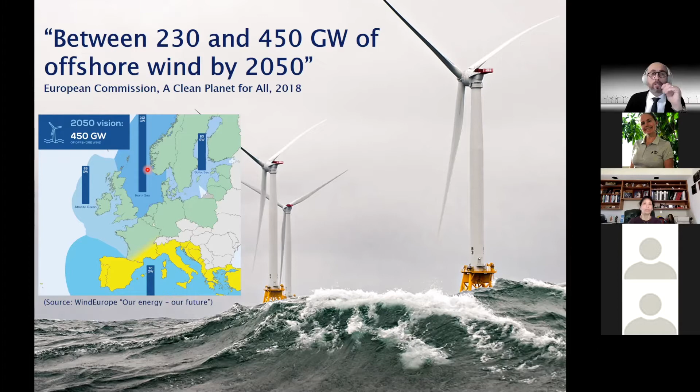However, offshore is not going to be all of it. These are long-term strategies of the European Commission, which expects that even in 2050, 60% of wind will still come from onshore installations. So this means onshore is not going away—actually, onshore is going to play a very important role.

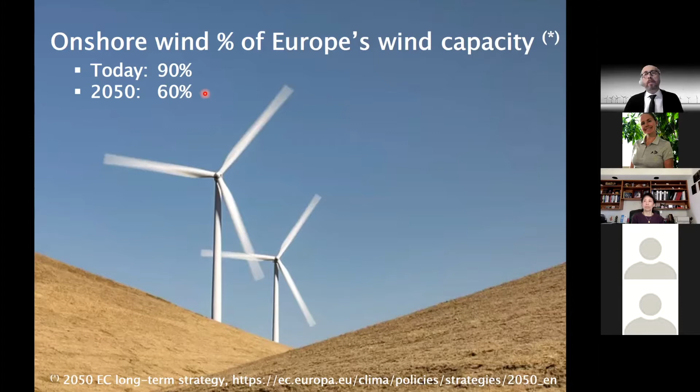And once again, onshore, especially in highly populated areas like Europe, means impacts. So the mitigation of impacts is really becoming a very pressing need. These are very ambitious plans and targets.

So the question is, what will take us there? What can make this possible? In my opinion, there are two fundamental things: innovation and scientific knowledge. So today we'll talk about a mix of the two.

I want to point out that I had the privilege recently to work with a number of distinguished colleagues, many of whom are here today. We wrote together a paper published in Science, where we identified three main grand challenges that need to be overcome in order to achieve these goals.

These grand challenges deal with the understanding, modeling, and simulation of the atmospheric and plant flow, and the turbine and the plant. The work we do in my institute is mostly related to the second and third topics—turbine level and plant level—so I'll spend most of the time today talking about those two things.

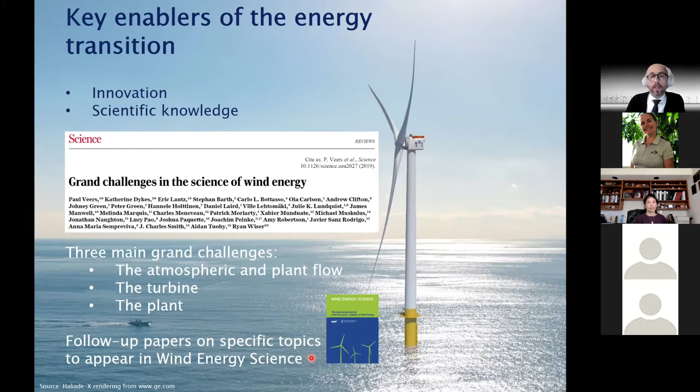However, before I jump there, I want to say a few words about the flow, which I think is of fundamental importance, although it's not really my field. The original team has split into smaller teams, and we recruited additional people to work on follow-up papers on specific scientific topics, which will appear in Wind Energy Science, the open access peer-reviewed journal of the European Academy of Wind Energy.

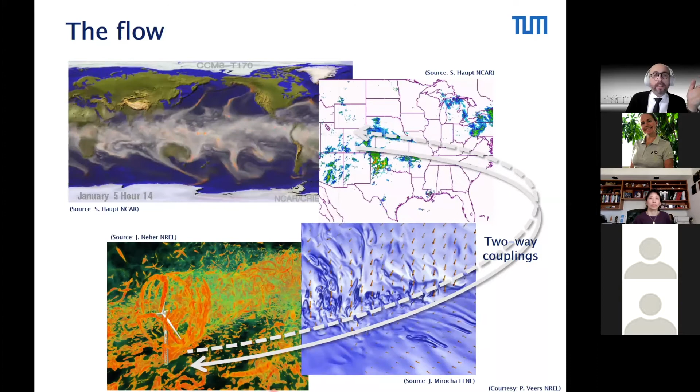So I want to show you this beautiful collection of movies I got some time ago, courtesy of Paul Veers, that makes the point that in reality this is a fundamental problem of incredible range of scales. We go from the global scale to the regional scale, to the plant level scale, then down to the inflow of the single turbine. This really is an extreme multi-scale, multidisciplinary challenge.

We need to be able to model and simulate what happens at the boundary layer scale—scales in space of millimeters and in time of milliseconds. Then you have to go through the inflow at the rotor, the intra-plant flow, we'll come back to that later, to the mesoscales, where you look at scales of tens, hundreds, sometimes thousands of kilometers, and time scales of hours, days, sometimes even weeks. So the range is incredible.

And this is not only a problem from the aerodynamic point of view—you have a similar situation from, for example, a structural point of view. When you look at material behavior and composites, you have matrix and fiber, microcracking, very small scale phenomena both in space and time. And then you go to the interaction of a 200-meter rotor with the inflow. So this is a fundamental challenge.

This fundamental challenge is even more difficult because it cannot be answered only by looking at super high fidelity, first principle methods, models, and tools. In reality, we have to design and deploy these machines, and therefore we are engineers in the end, and we have to solve a number of practical problems.

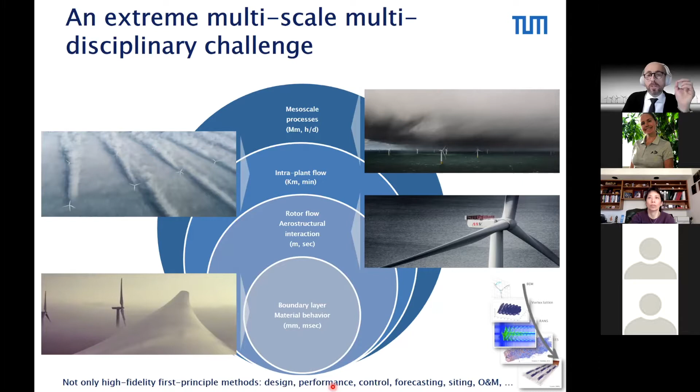And so, for example, design, performance, controls, forecasting, siting, operation and maintenance. In order to support these applications, you need a range of tools that are able to span the scales in space and time, but also span the application space, which is extremely challenging. Also, some of these applications are extremely demanding, repetitive tasks where you have to do multiple simulations many times, for example, because you're optimizing something. So this really raises the bar and makes this one of the main challenges, I think.

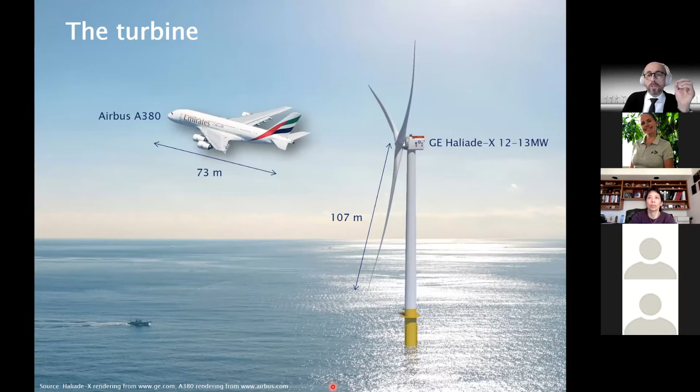Now let's turn the attention maybe to the turbine, and then we'll talk a little bit about the plant, because as I say, this is maybe closer to the things that we do. So I just want you to look at this picture to get an idea that we're dealing with the largest rotating machines on Earth. And getting there has been a process that goes back a long time.

It started a long time ago in garages in Denmark, which, however, these guys identified, I think, a configuration that is clear as a very important potential. And over time, this has grown and will keep growing over time. And this has been made possible not by simply zooming up or upscaling the initial designs. Really, this path of growth and evolution has been made possible by fundamental innovation at all levels.

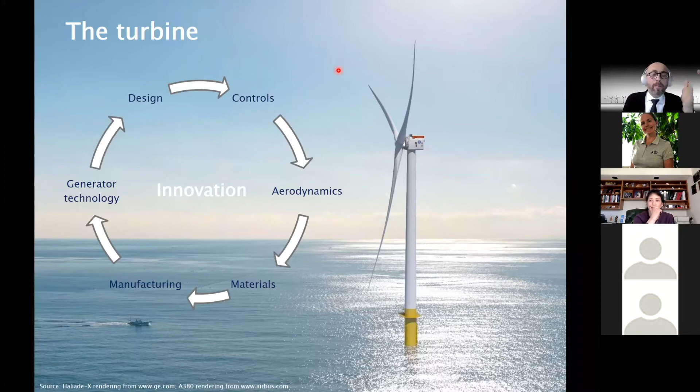So if you talk about the turbine, I tried to list here some of the areas where innovation is important. It's certainly not an exhaustive list, but design and controls technology, aerodynamics, materials, manufacturing, generators technology. Innovation is really present everywhere. I think this is clear to everybody.

What I want to highlight here is one important thing: the importance of assessing the value of innovation. Sometimes it's relatively easy to have an idea, but then in the end, whenever you have something new, you have to realize that you'll have some benefits, but you'll also have some drawbacks. And so in the end, you have to ask yourself, okay, this is a nice idea, but do the benefits really offset the drawbacks? Does it make sense to use this? Does it really pay off? And sometimes answering this question is not obvious.

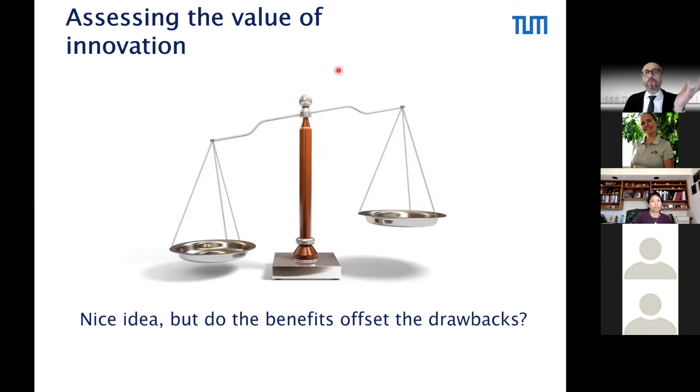So you can give lots of different examples. I take the opportunity to show you one recent example taken from a paper from one of my very brilliant PhD candidates in my group. Here we have been looking at lidar-assisted controls.

This is nothing new, this is called LAC. The idea is that you have a LiDAR, a sensor that is scanning the wind in front of the rotor and measuring the wind. This is beautiful because you are measuring in front of the rotor. So let's say that you measure 100 meters in front of the rotor and you have a 10 meters per second wind. It means that you're measuring the wind that will hit the rotor 10 seconds from now. So you have a preview of the future.

This is fantastic because, by definition, if you think about feedback controls, feedback controls is always late. When you do feedback controls, you're measuring the response of something, and then you're reacting to that measurement or response. But if you measure a response, it means that something is already happening, so by definition, you're late. With preview information, you avoid this because you look into the future.

So this is certainly a very nice idea. There have been many papers over several years, with people looking at various formulations and so on, and it's clear that this is a significant potential for reducing loading. So now that we know that we can reduce loads, then the question is, okay, what do I do with these reduced loads? I can try to improve the design. And so we try to see whether these load reductions really make sense and bring value.

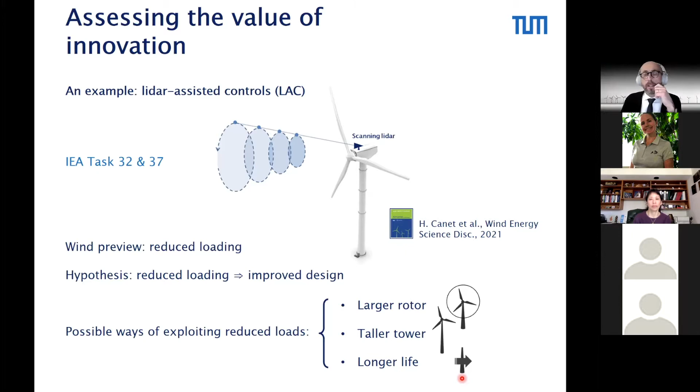The tower becomes an expensive component with a longer lifetime. Again, this is something that could be enabled by lidar. So we studied these three ideas looking at three very different turbines: a 10 megawatt class 1A offshore, a 2.2 megawatt class 2A onshore, and a 3.4 megawatt class 3A onshore. We looked at the potential of lidar for redesigning these turbines.

The main findings are: first, you can try to reduce ultimate loads. The problem is that not all components are driven by ultimate loads, only some of them. And not all driving loads come from conditions that can be influenced by lidar. For example, in many turbines, some extreme loads come from conditions where the machine isn't even controlled, like idling or parked. In that case, even if you reduce a load in operation, the driving load is another one you cannot change with lidar. So basically lidar doesn't really do anything there, it doesn't bring you any value.

In addition, if you design a turbine with reduced ultimate loads thanks to lidar, you have to be very sure that lidar will always catch the condition causing those loads. This might mean having multiple lidars and ensuring availability, and so on. So it's not easy to improve the design by looking at ultimate loads using lidar.

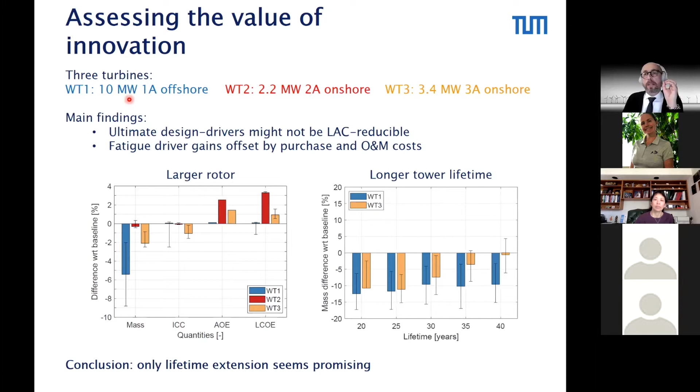The only solution where we saw some benefit is this idea of designing for a longer lifetime, especially in the case of the 10 megawatt turbine, where the tower is massive and costs a lot of money. It's not the point here to go into the details of this specific study, but the point I want to make is that real innovation is not just a new cool idea. If you want to understand whether your new cool idea really pays off, you have to take a system-level point of view. Design is really the queen of all disciplines, where you bring everything together and evaluate pros and cons and find trade-offs to really understand what works and what doesn't.

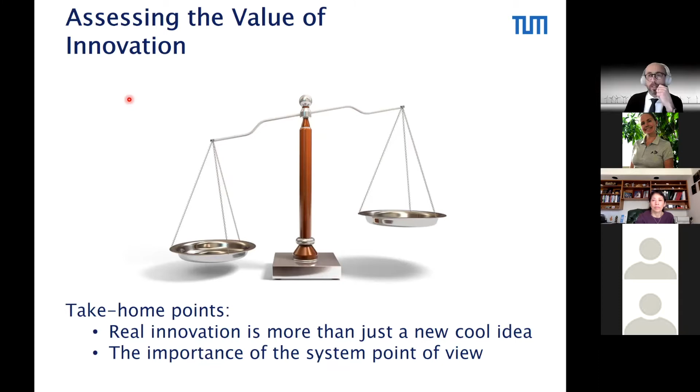I also want to make another point here: innovation should not be meant only to improve performance. In reality, especially onshore, especially in some countries—Germany, I think, is maybe the number one example—impacts are dramatically important. There are places with a lot of opposition to wind energy, and the only way to reduce this is by showing that we can mitigate the impacts. Of course, every technology will always have impacts, and wind energy also has impacts. I'll try to list here at least some of the impacts in the onshore case.

From noise to impacts on the wildlife, visual impact, also things that go maybe sometimes beyond engineering. So perception, aesthetics, heritage preservation, very important in the south of Germany, for example, but also low frequency vibrations, effects on the microclimate, crops, but also energy consumption and emissions during manufacturing of the turbine, and also end of life.

Today we're still able to recycle very little of our wind turbines. Most of the blades end up in landfills. So repurpose, recycling, all these things are becoming of great importance.

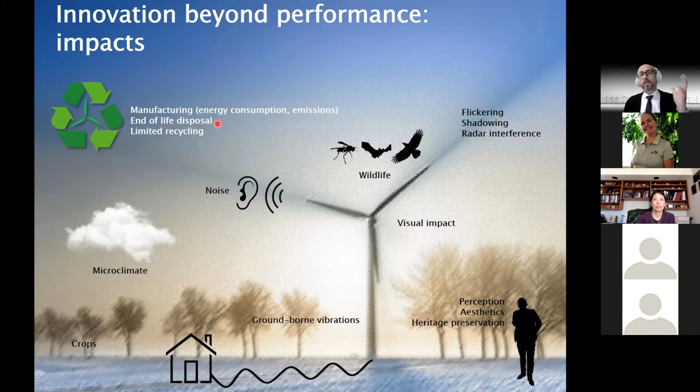Even here, I just want to give one example. Of course, this is a huge topic and a lot of people are working on these things. I just want to show one recent work that we did in my group.

We tried to say, okay, instead of designing as usual a turbine looking mostly at LCOE or other metrics, but still related to purely economic metrics, can we do an eco-conscious design of the turbine where we take into account the whole life cycle of the turbine?

So of course we still take into account LCOE, energy production, operation costs, and everything, but we also want to look at other aspects. Specifically we have been evaluating the impact in terms of greenhouse gas emissions expressed in terms of tons of CO2 equivalents.

And if you start digging into this, you can see some interesting things. You can break down the impact of energy in terms of these greenhouse gas emissions during the various stages of the life of the turbine. For example, material extraction, manufacturing, operation, end of life.

For example, end of life, here you have a negative budget in the sense that we can recycle something. This is mostly coming from the steel in the tower today, nothing more. And then in the end, we can evaluate the total impact.

You can also break it down by components and materials. This is also very interesting. It shows that the tower is the number one component we have to target, but then the nacelle, the blades are also very important. And there is not only the point of view of the turbine, you also have the point of view of the grid.

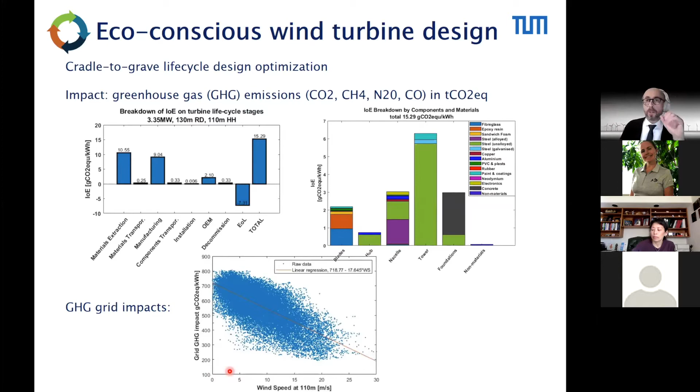The cost of energy spot market price also typically has an inverse relationship with wind speed. So both trends will push you in this direction. Again, means bigger and bigger turbines with low specific powers.

So we take this, we throw this into our design environment, which would be maybe similar to what you have in the US, like WISDEM. This is something that is able to change the blade shape, diameter, rotor, tower height, sizing, all the various structural components.

Running all the various DLCs and taking into account all the classical things that you need to take into account when you design a wind turbine according to the standards, the design standards.

So we throw this to this environment, and we solve a multi-objective optimization problem now, where we look into cost of energy, but also this environmental impact.

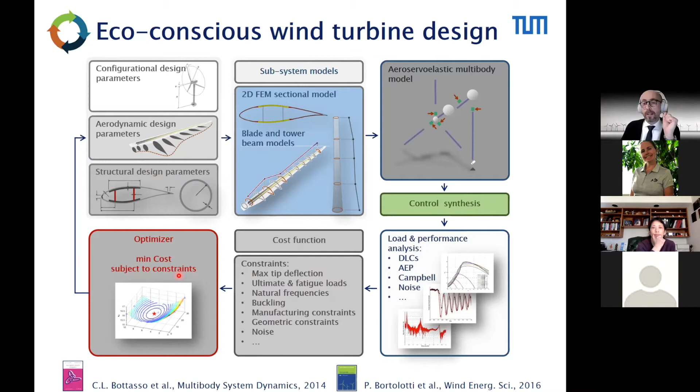We can also take into account opportunities coming from other technologies to reduce the emissions. For example, hybrid towers where you have less steel, more concrete, generator technology, materials like Elium, for example, or similar thermoplastics where you can improve the recyclability.

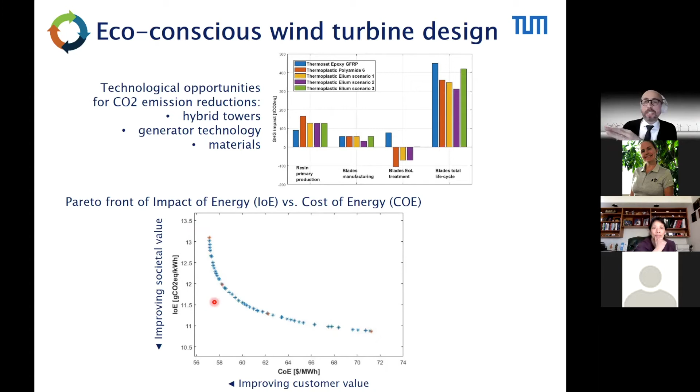This brings me to another take-home point. What is value? Value has many different meanings for different stakeholders. If you take the point of view of society or the final consumer, you might end up with different solutions. This shows we have to be careful, and there is much beyond LCOE. I really think we have to think more in the direction of value. What is value? I think we can discover lots of interesting things if we keep exploring in this direction. Let me move now to the plant level.

This is a fascinating topic because the plant is not simply a collection of wind turbines. The turbines are coupled together by the wakes. Behind the wind turbine, you have lower wind speed, so you have a speed deficit, meaning you produce less, but you also suffer increased loading due to higher turbulence. This brings the level of complexity to another level, because you have a coupling through these turbulent wakes. You have to understand how they behave, how they change properties depending on ambient conditions, the design of the turbine, and how you operate it. This is another huge area where innovation can make a really big difference.

I listed here a non-exhaustive list of important topics: wake physics, plant controls, which means how you coordinate these turbines together so you improve performance not at a single unit level, but at the level of the whole plant. How you measure what is going on, how you design the plant, how you use data, how you connect to the rest of the grid. There are lots of aspects. Clearly we cannot cover everything, so I just want to make a few points.

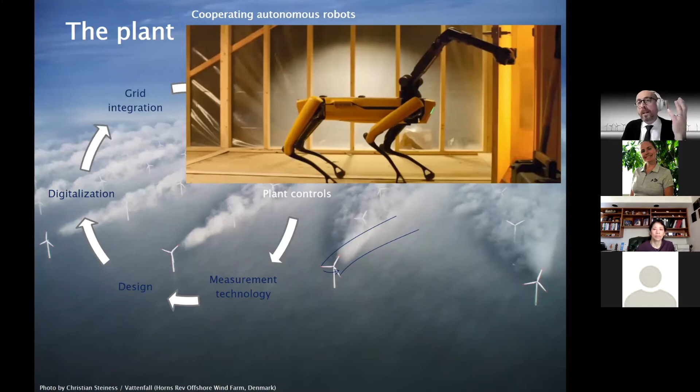Clearly, the payoffs are very important, because if we learn how to do this well, I think we can have a lot of benefits at various levels. Again, I don't want to talk about the specifics of wind farm control. I think you have lots of experts also in the US, and a lot of these ideas are also coming from people in the US. So it's not the point here to recall all this.

I just want to make a point on validation. In the end, we need to prove to industry that this works, and this is, of course, the final goal. And this is indeed also what we are doing.

So these days, we're actually running a wake steering experiment in a site called Kirch Mulsow with some colleagues in Germany. It's based on the idea of wake steering. This is the wind farm that we're using just these days for these experiments.

However, I want to say here that field testing is indispensable, but it's not an easy task. It costs money. Whenever you do field testing, you will have some power losses, probably energy losses that you'll have to compensate, and so some people will have to be reimbursed for this. You have liability issues, you have IP issues very often. Even if you work with companies, you don't have full access to all the information that is relevant to your experiment.

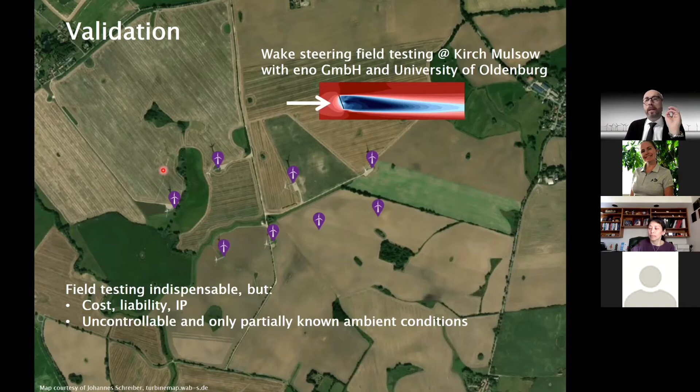In addition to this, you have no control over the environment. So the wind is what it is, and you only know it partially. Even if you have maybe a met mast, as we have in this site, even if you have LiDARs, very often you have a partial understanding of the conditions at the site.

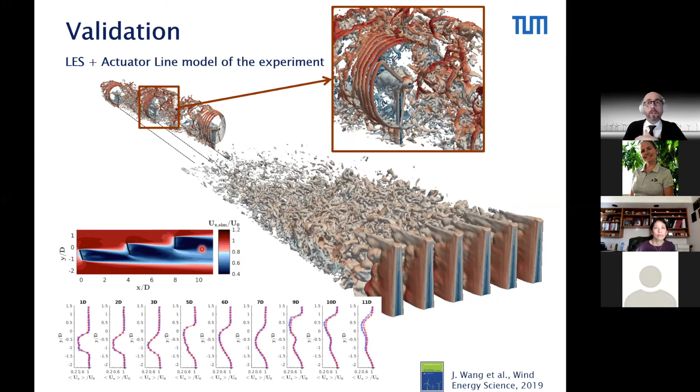And we can go and check and show that we indeed have good accuracy, even in these complicated wake interaction conditions. So to me, this is something that has a very important value, also to add to the credibility of the tools that we're using in a number of applications today.

Again, without going into the details, but I think there are also some interesting questions. For example, all these controllers are based on models of the flow, so they're model-based in a sense. The question is, do you really need a very accurate model, or can you do also with a rough model? And we deal with uncertainties everywhere.

So the flow is uncertain, the wind direction is uncertain, where the turbine is pointing is also uncertain. So we typically use robust formulations that try to hedge against these uncertainties. And we can also answer the question: are these uncertainties, are these robust formulations, really important?

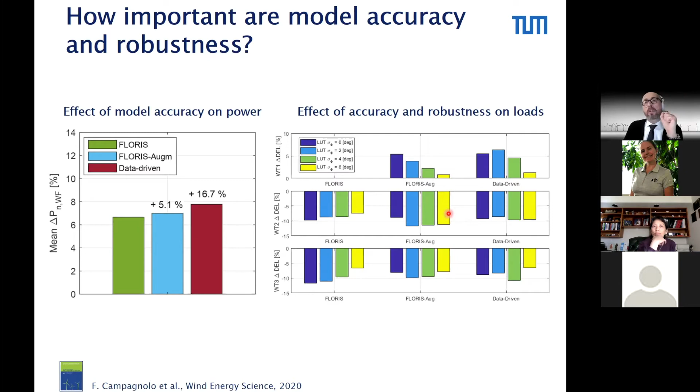Now, I probably don't have time to go into the detailed explanation of these diagrams, but since we know what the ground truth is in this case, we can answer these questions through these experiments—something that, in my opinion, can only be done in part at full scale.

Another important topic is machine learning. Everybody's jumping on machine learning now, using data to improve models. But the question is, when you're learning something, are you sure you're learning the right things, or are you only doing data fitting? Can you prove that you learn the right things? In order to do that, you have to have good knowledge of the ground truth.

For example, here we were trying to learn secondary steering. Secondary steering is a phenomenon that takes place when you steer a wake—you create a lateral flow outside of the wake, and this lateral flow changes the inflow at the downstream turbine. This turns or changes the direction of the inflow at the downstream turbine. This is called secondary steering.

Now we use data to learn secondary steering. But since we can measure everything and know the ground truth, we can prove that we're not simply data fitting, but actually learning the right correction, the right phenomenon.

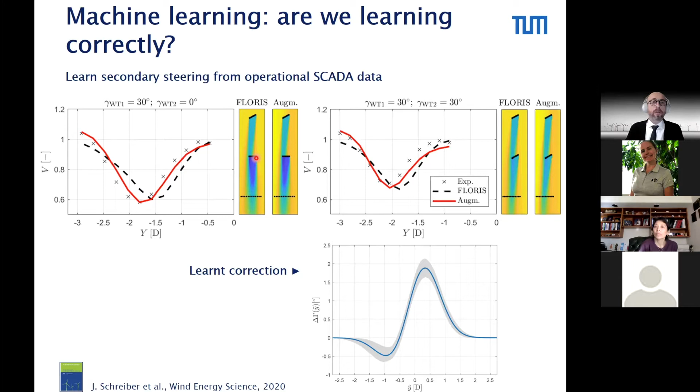So to summarize, I think a take-home point is: the field is the final judge. I'm not questioning that, it's obvious—we have to go to the field, the field remains extremely important. But in my opinion, there is value in controllable, repeatable, scalable experiments that have the right degree of sophistication. If you do things the right way, you have scaled experiments that are very interesting and very realistic.

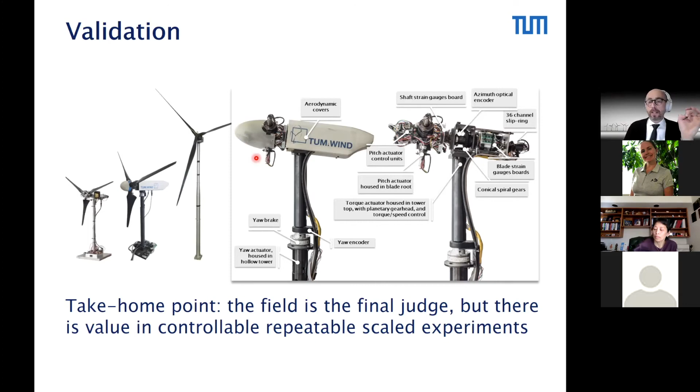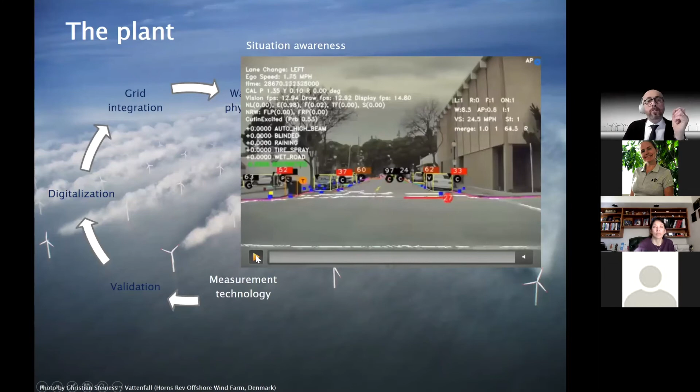And then I want to leave you with a final example, a final point here, on the topic of situation awareness. I want to show you this movie—this is what your Tesla autopilot sees when you drive down the streets of Boulder, for example. Look at this, it knows a lot of stuff.

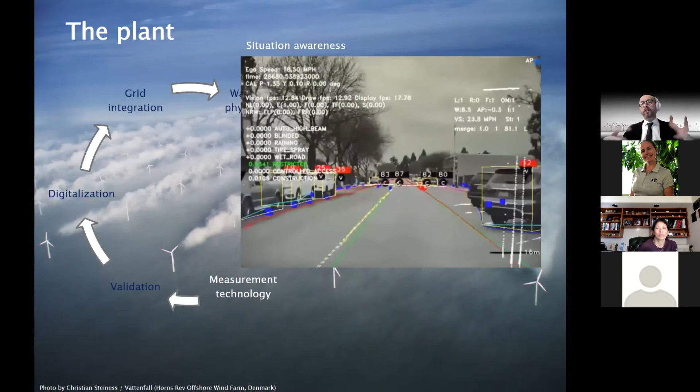And this is on the fly—it's able to recognize the environment on the fly, and the ability to drive the car in an environment that is unknown a priori and changing all the time is built on this situation awareness that comes from the use of a number of sensors. Situation awareness, in my opinion, is the key element of most advanced control applications today.

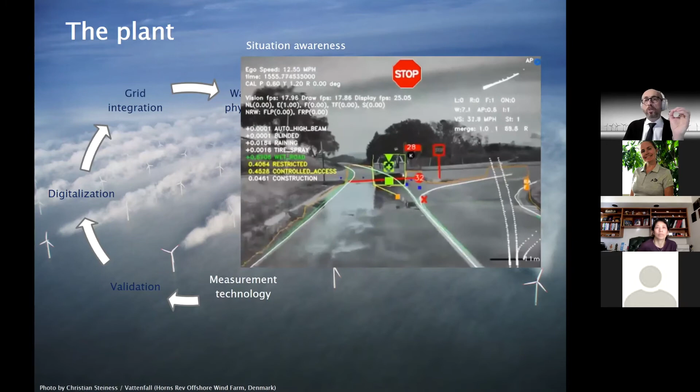What is the situation with wind turbines? In my opinion, we're lagging behind a little here, because a wind turbine today is equipped with a sensor in the nacelle—an anemometer and a wind vane—that gives you nothing else than a velocity vector at a point: speed and direction, nothing else. So from a point-wise measurement, you know nothing about vertical shear, and you know nothing about whether there is a wake impinging on your turbine or not.

So in reality, we're saying that we're doing sophisticated robotic applications in changing environments, but having no clue—or very little clue, I'm exaggerating of course—of what is going on. So my question here is: can we do better? And I think we can do better.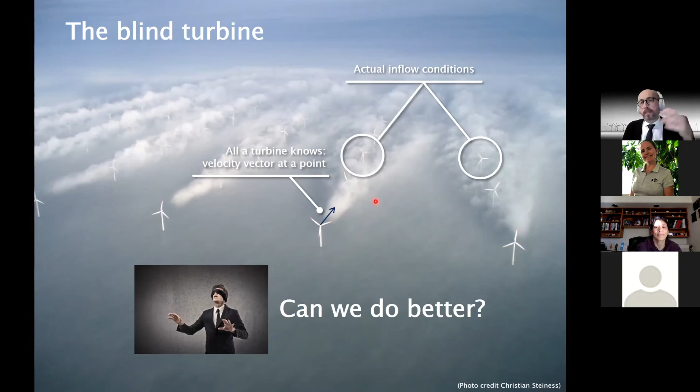We've been trying to push the idea in the last few years in my group of developing what we call wind sensing, which is a pretty general idea—that you have data anyway. You have power, you often have loads. Many modern turbines already mount load sensors because they do IPCs, individual pitch control for load reduction, or health monitoring, these kinds of things. So you already have a lot of data.

The question is, can we use this data to essentially measure the response of the turbines and estimate the inflow conditions? Can we estimate the vertical shear? Can we estimate whether there is a wake impinging on the turbine? If the answer is yes, I think we can use this information in many different ways for wind farm control, but also for lifetime estimation—you name it. It's clear that if you have this information, you can find good ways of using it.

Of course, LiDARs will give us all the information that we want in the future. But in reality, I think we can do a lot today for free. Because if you have these load sensors installed already, this is a software update, so you don't need any additional hardware. It's simply using the information you already have in a clever way. I want to give you two examples.

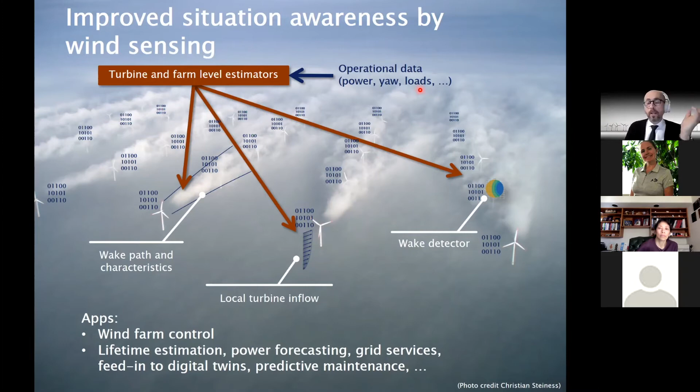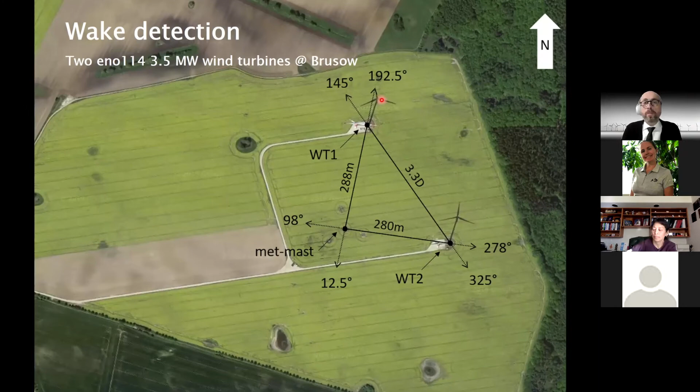This is a test site in north of Germany called Brusow, where we have 2 wind turbines, 3.3 diameters away. We also have a met mast, and these turbines come equipped with load sensors. Here we want to show the ability of measuring the presence of the wake, the impingement of a wake from the front turbine to the back turbine.

I don't have time to go into the details, but essentially we use the blades as local sensors. The blade, as it moves over the rotor disc, scans the rotor disc and feels changes in local wind speed. So it's essentially a correlation between wind speed and loads.

Now what we do, we also take a sort of average. We look at 2 quadrants, let's say left and right, and then we can estimate the average wind speed on these 2 quadrants. By doing this, we can try to track the presence of a wake.

For example, here in this movie, let me restart it. Hopefully it will restart. Okay, in this movie, that is not restarting. Okay, now it is restarting.

You see the direction of the wind that is changing. The total wind speed with respect to the one measured by the mast is also changing. So here you're measuring the wind speed downstream, you feel the presence of the wake when the wind is blowing in the direction of the 2 turbines. But here you see the red and blue sectors, and by looking at this difference, you can fit your wake.

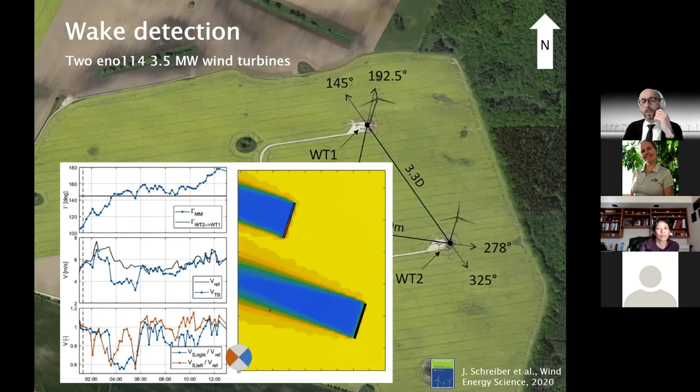Another application is estimating wind shear. Again, vertical shear is not something you can measure from a single anemometer in the nacelle. Here the idea is similar. We use the wind speed, in this case, over 3 sectors.

From here, we measure the vertical shear and compare it to the shear measured at the met mast. We do it only with 3 sectors because the met mast is only tall up to hub height, so it doesn't reach all the way to the tip of the rotor. Here you see a comparison in black of the shear measured by the met mast and in blue the one observed by the observer. It's not perfect, but it's picking the trends.

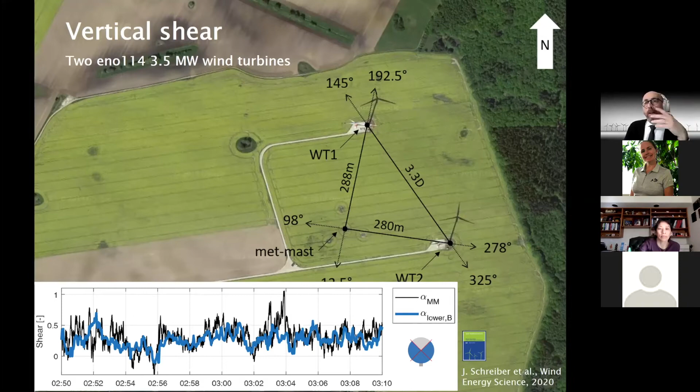I think most of today's wake models that we use for wind farm control only look at turbulence intensity as a proxy of stability. In reality, that's not necessarily the only indicator. We should probably also use some other indicator, and I think vertical shear is certainly a good candidate.

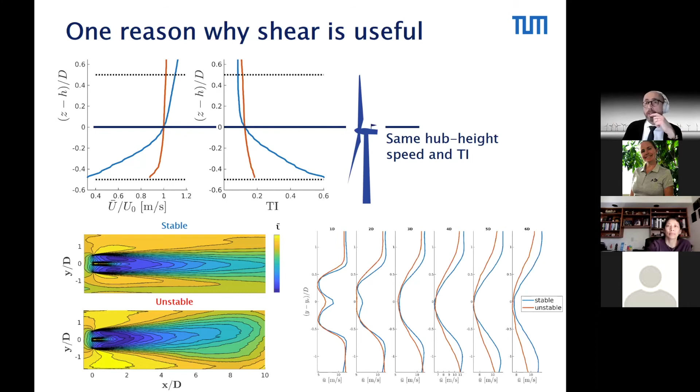I just want to make a couple of very quick comments. I think the future looks bright. Wind energy will play a fundamental role in this revolution that we're living, and we're lucky to live in these interesting times. As scientists, I think we're certainly not out of work.

There are lots of interesting things we can do. So it's not business as usual. It's not simply deploying the turbines in the field. It is innovating. So there is a fundamental role of research and innovation. I want to stress that this is not a collection of knowledge already available somewhere else that we put together. We really need a dedicated body of science, and this is emerging clearly today.

Everything will work and keep working if we have a healthy collaboration between industry and academia. This is of fundamental importance. Only working together can we make progress on all fronts.

And then finally, education. Education is of fundamental importance. We need people with the right skills, with the right background. And so this is becoming more and more available. Up until a few years ago, you saw only very few courses dedicated to wind energy in universities worldwide. Now the situation is changing. But this is, again, of great importance, so we need to go in that direction.